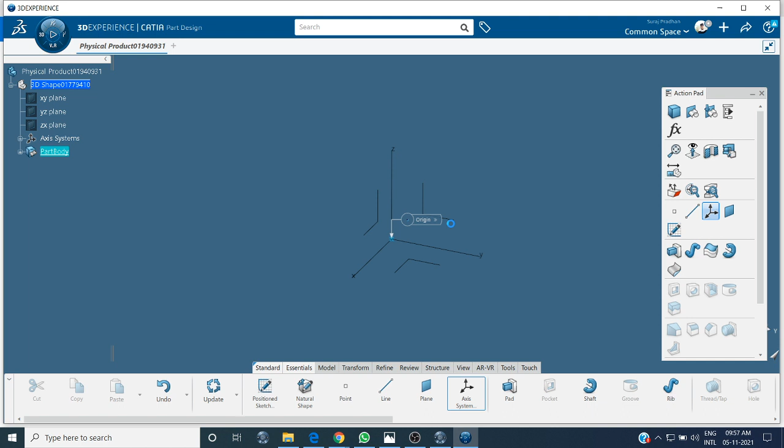This origin, okay, then go to the sketch. Yes, just for recording.

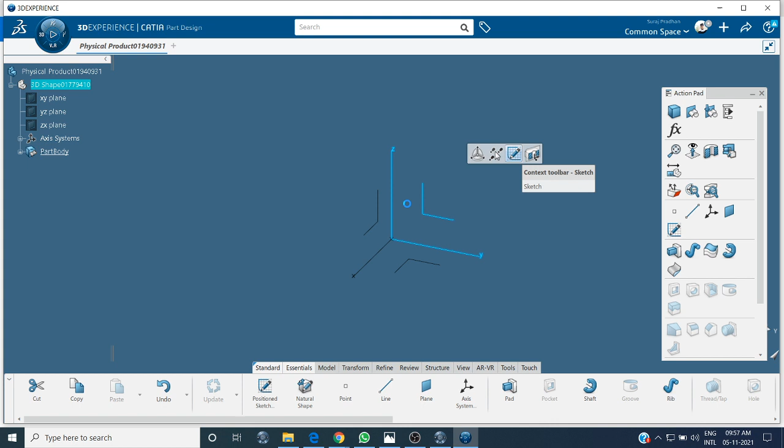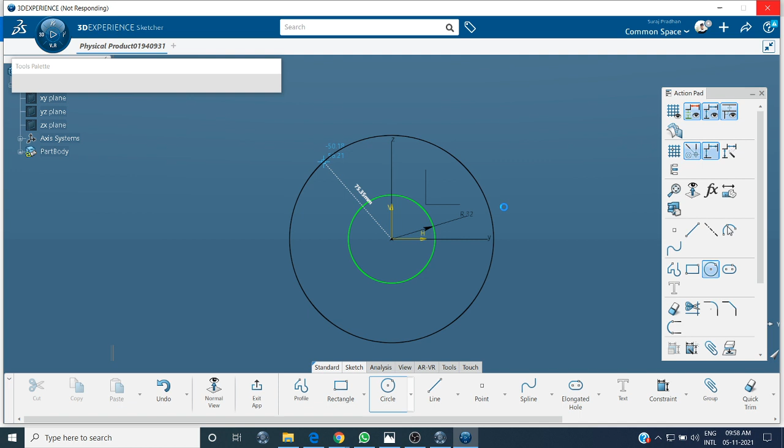Create a circle. Circle radius is 32. Another circle, because we need to draw three circles: 32, 62, and 85.

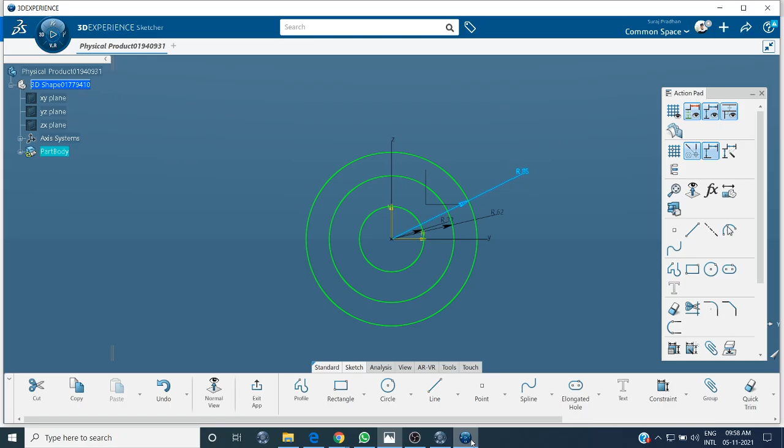Now you can see in this picture that the middle circle is not a physical line, it's a dotted line. So for that we need to make it construction. As you can see, the construction work has been done.

Then we will insert some keyholes. How many keyholes are there? There are 6 keyholes, and the total circle angle is 360, so 6 keyholes means 60 degrees each. 360 by 6 is 60 degrees.

As I already explained, there's a smart way for this using mirror operation. So I will make two axes here, giving an angle of 60 degrees each. First angle and second angle, it is 60 degrees.

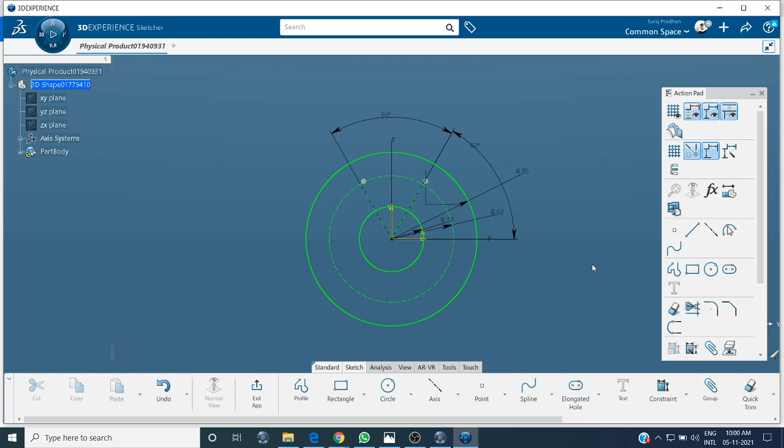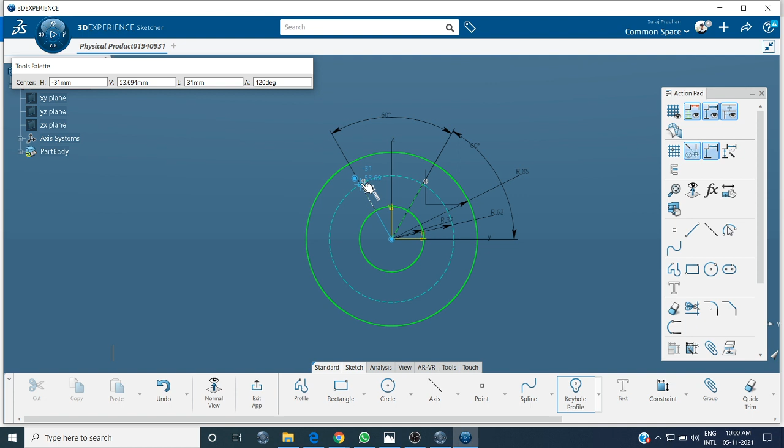Then there is the keyhole. Keyhole diameter is 14. So I will go for direct keyhole, starting from this point.

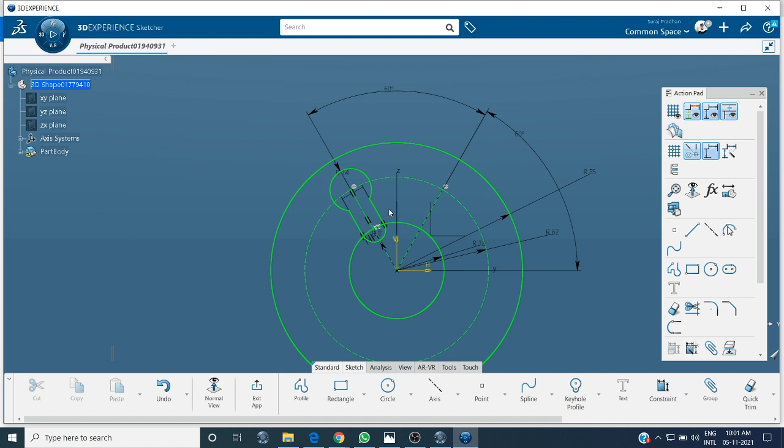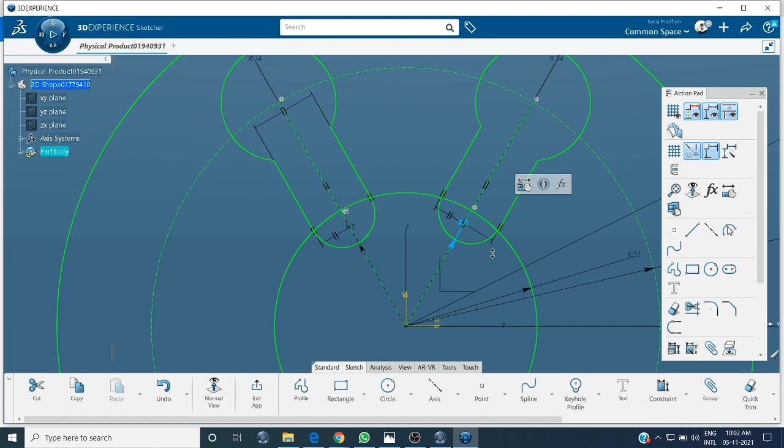Same thing we will do here, another keyhole starting from the end point. The radius is 14, here it is 8. Sorry, that's the radius - diameter is 14.

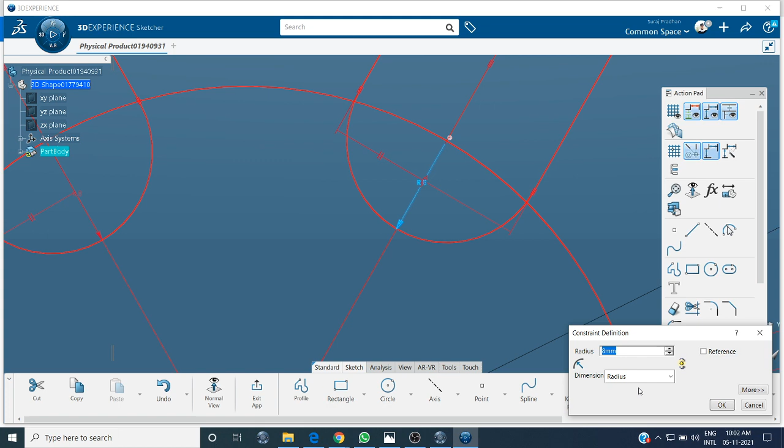Here I did some mistake. There it is. Okay, again this one is 4mm, and this one is diameter 14.

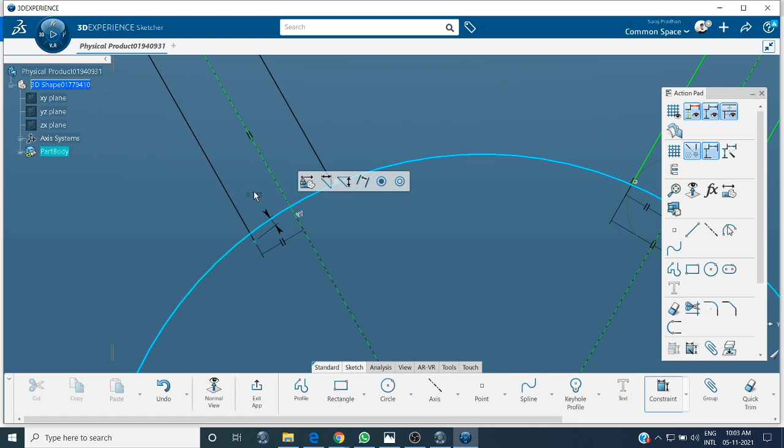If you want to trim - I think it's not connected here, so make it coincident with respect to this circle. I think this distance is not mentioned, so we will make it 4mm, and from this line to this point the distance is 4mm. Now you can go for selecting each of the axis.

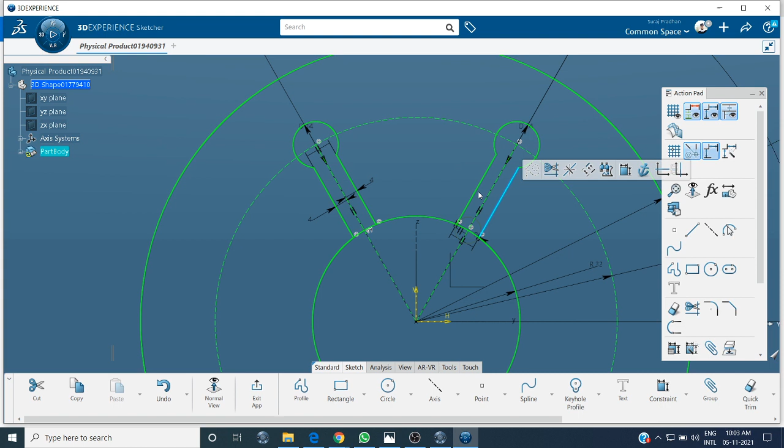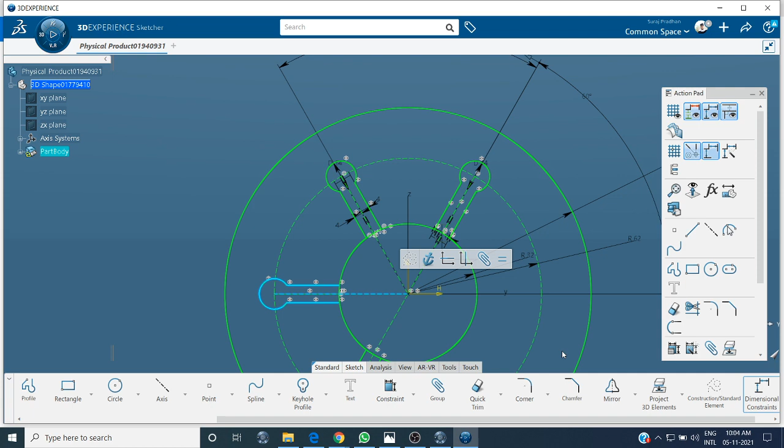And mirror with respect to this axis. Same thing, mirror with respect to this axis. Mirror with respect to this axis.

I think 6 keyholes have been completed: 1, 2, 3, 4, 5, 6.

Now you can see in the picture we don't want this middle one, so I will go for trim, quick trim, double click. While doing trim, it may create some unwanted condition, as you can see it is not connected here.

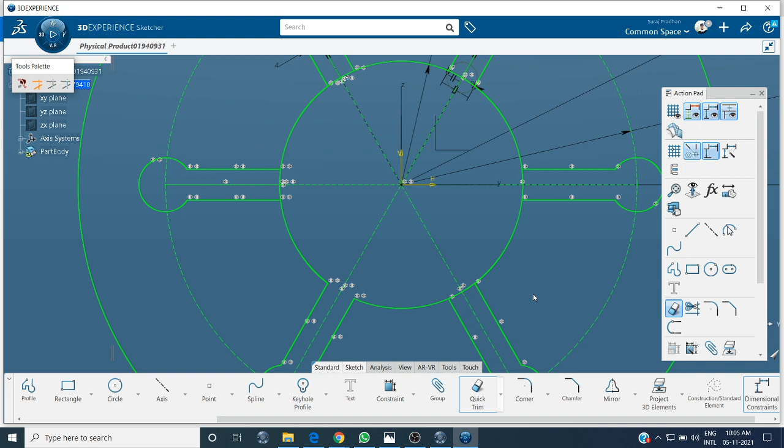This is not - just a second. As you can see, this point and this are not connected together. It's creating some problem. For that, we will go for this approach.

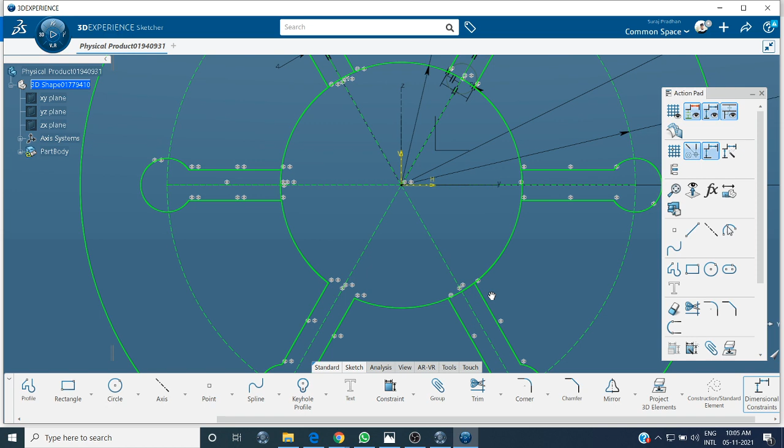Go to three, same thing - first connect each of the lines, make as coincident. Everything is coincident except this one - make it coincident first. Okay, then go to quick trim.

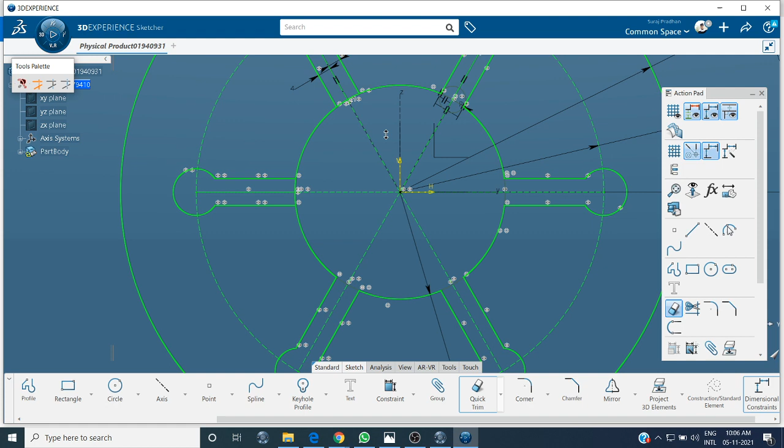I think the middle one we have completed. Now comes the outer one. Here we have two circles, one diameter is 12, another radius is 14. I will do that one first.

Two circles, one diameter is 12, another radius is 14.

But we want to make it one center point, so for that I think you know how to make it concentric. So from this point to the horizontal axis, what is the distance? As you can see, the distance is 104. So if you divide it, the dimension distance from the center of the circle to the axis is 104 by 2, meaning 52.

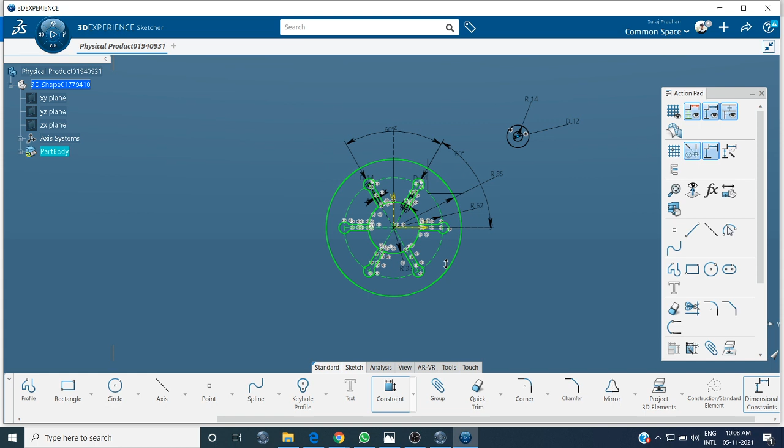It is 52, and from this point to the vertical axis what is the dimension? It is 94, so 94 by 2 is 47.

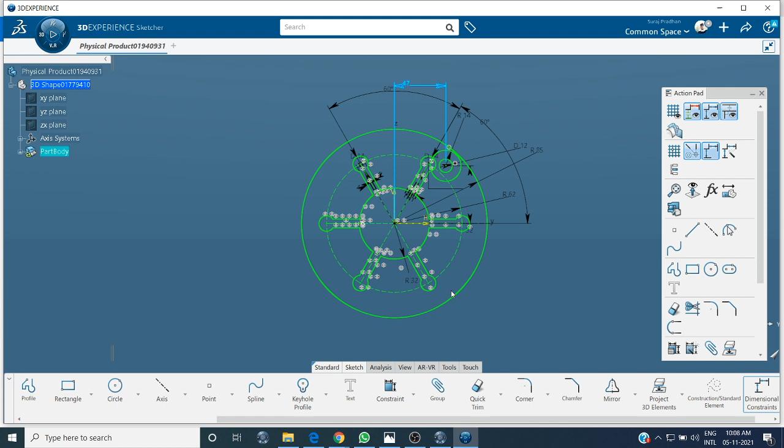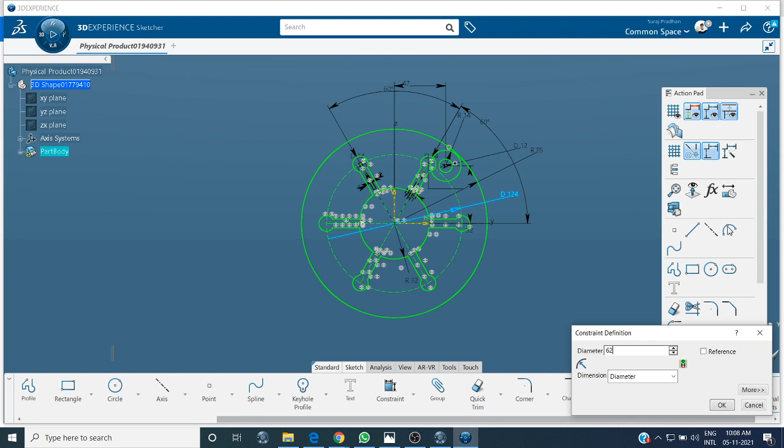Oops, we made a mistake I think - these are diameter, 32 diameter. Okay, this is 32 diameter, I did it wrong - this is 62. 32, just change it, no problem. Okay, and this is diameter 85.

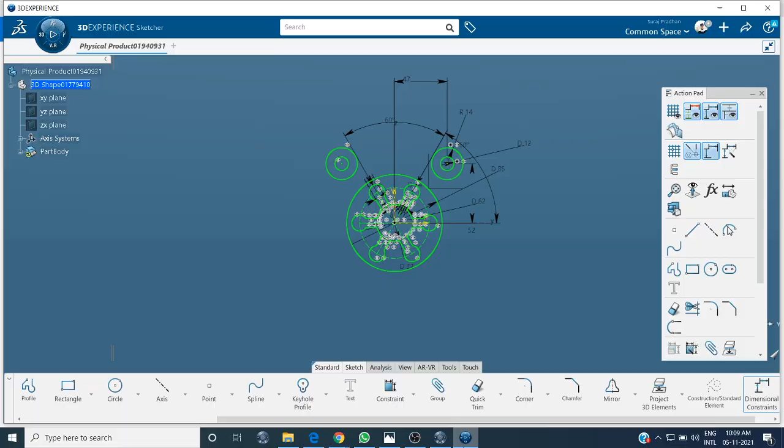Then same thing, how many are there? Four. So we know the mirror operation - just select these two circles, mirror with respect to the vertical axis or horizontal axis, let's do it with the vertical axis, and mirror this to the horizontal axis.

Now we have the option for circle - this is a bitangent line, so we have tangent, make it bitangent line. You can do it manually.

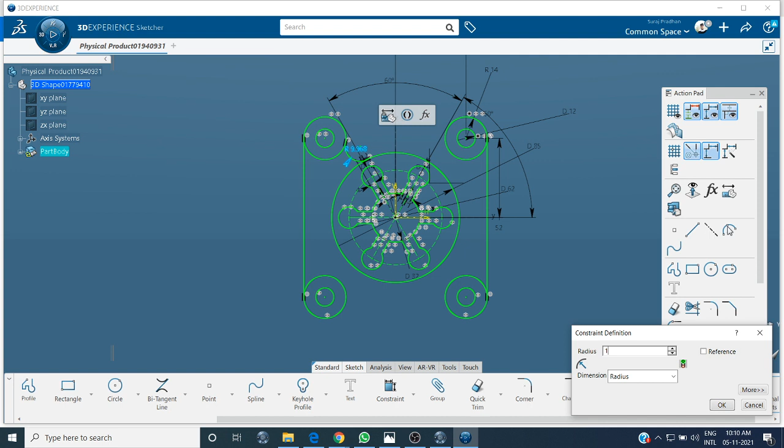Then we have the corner operation - corner, no trim, from here to here, what is the dimension? Radius is 12. So one corner completed means we can mirror with respect to the vertical axis, mirror with respect to the horizontal axis.

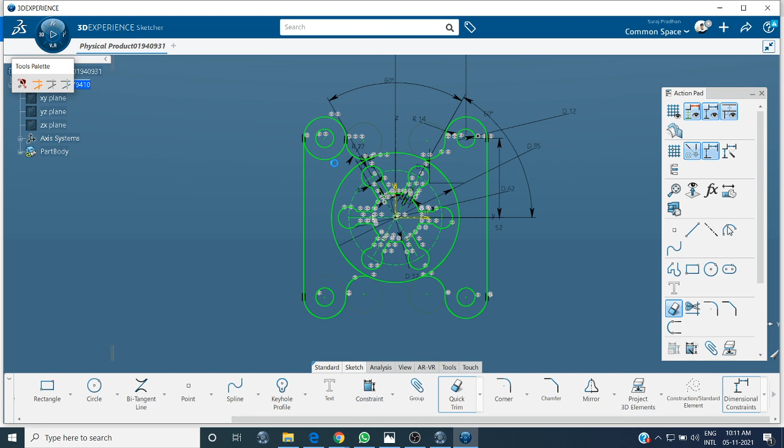Then the unwanted part you can remove, just go for trim. I think it's complete. It's completed, so thank you all.